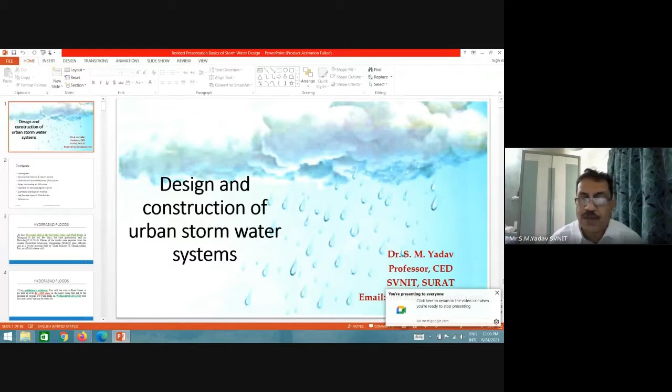So that was the first lecture on the topic of smart cities, and from the smart cities point of view, how we can protect our smart cities from recurrent floods. In this lecture, the other part of it, that is stormwater management, which is one of the key parts of planning of smart cities. Whenever you develop smart cities, one of the major planning and design requirements is the urban stormwater system.

I remember one incident that was told by my colleague who is a part of the Dholera development plan. In that Dholera development, one very senior hydraulic engineer was present, and they were talking about the cost of laying the stormwater management system. Somebody from the experts said, this stormwater drainage which is proposed is costing crores of rupees. Instead of that, let us go for reduced diameters of the pipes, revise the stormwater system, and not go for the system which is proposed for draining Dholera.

You know that it is a special investment region, and probably in 2024 or 2025 there is a phase-wise development, and after 10 years, probably a city like Singapore. That much initiative, planning, measures, and new developments from the smart city point of view are going on in Dholera, the special investment region.

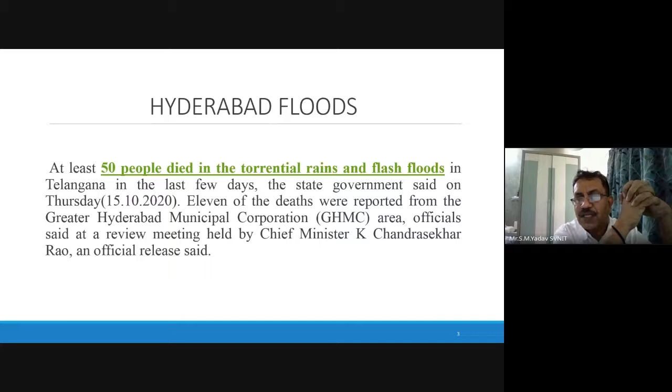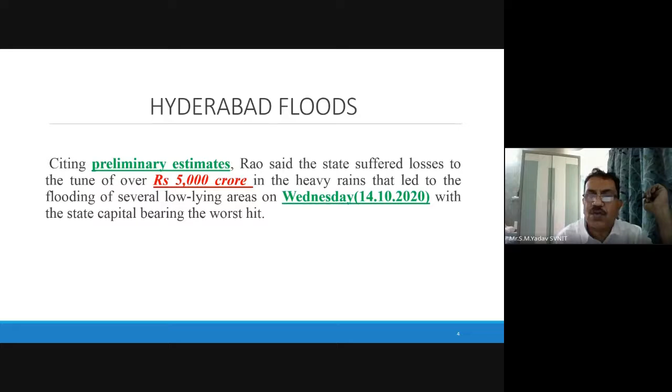I think Hyderabad is also one of the smart cities, and in October 2020, 50 people died in the torrential rains and flash floods in the city, right? And that is over Telangana, and the loss was around 5,000 crores, right? So what has happened, we will see here.

This is the picture which you see on your screen. That is not of any stream or nala. Usually you see such a picture in case of water flowing in a river or a stream. Here you can see it is a street, right? On either side there are houses, and you can see the people are also there.

Yeah, I can use the pointer now. Yeah, I got that. Let me take the laser pointer.

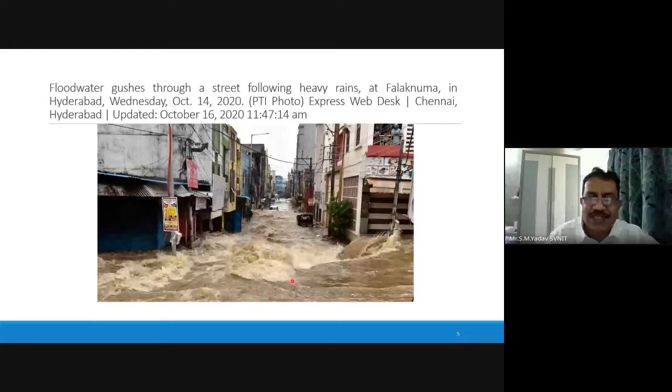Just see here, these are the people who are watching this water which is flowing through the streets. And you can see how much is the depth. Here is a jeep parked on a street, and almost its tires are underwater. So the depth of water is approximately half a meter to 1 meter, right? And as I said, it is not a stream or a nala, but it is a street, and through the street the water is flowing like this.

So this is the picture of your FDP. Jagruti ma'am, if you are there, you can use this as the picture of this FDP on why smart cities, why smart city planning is required, right? So you can post this picture whenever you are presenting in front of the authority.

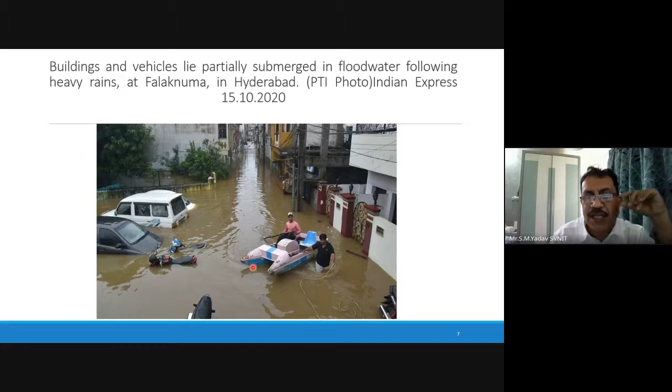See the picture here; this happens when there is a flood in a city. This has happened because of torrential rain in one of the societies of Hyderabad. This picture was taken by PTI Indian Express on 15/10/2020. So this gives an example of the significance of stormwater drainage and how important stormwater drains are, right?

Flash floods. These are the heaviest rainfalls in Hyderabad: in 1908, 153 mm; in 2016 it is 215 mm, right? And in just 36 hours, 220.7 mm of rainfall in August 2006 took place, while in September 2016, rainfall figures up to September 25. So such a huge rainfall received by the city of Hyderabad has resulted in the floods in Hyderabad city.

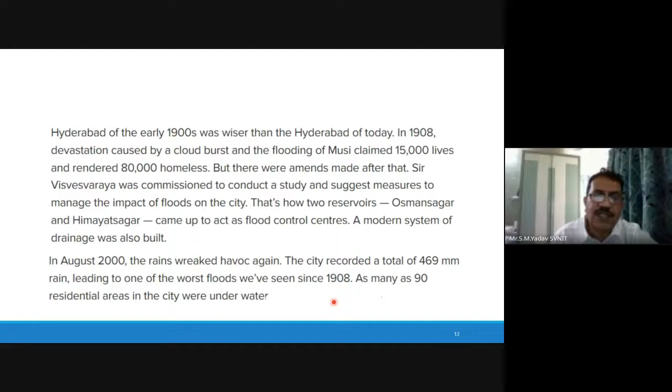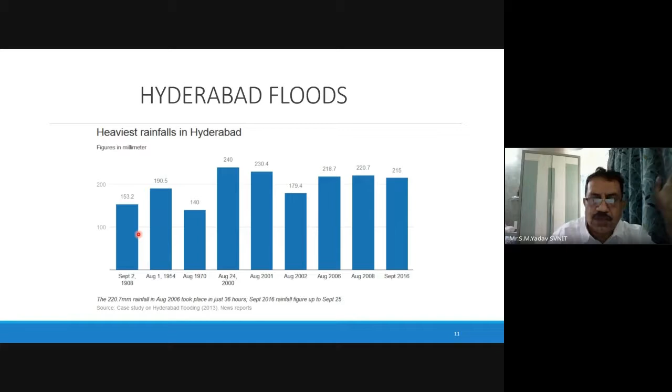So keep in mind one thing: the flood which I showed in the previous lecture was a riverine flood, right? The floods were caused in the cities because of flows from the river. This is not a riverine flood. Understand the smart city infrastructure requirement from this point of view: in Hyderabad the flooding is not due to a riverine flood, it is due to rainfall. And when there is high rainfall in Hyderabad city, a number of areas of the city are under water. Okay, so this is all history about Hyderabad that I am not reading.

But why do we need an urban drainage system? After giving this background of what has happened in Hyderabad, we emphasize a good drainage system in smart cities. Drainage systems are categorized as major or minor systems. So the urban drainage system can be classified into two parts: major drainage system and minor drainage system. The major drainage system comprises open nalas and natural surface drains. The minor system is a network of underground pipes and channels.

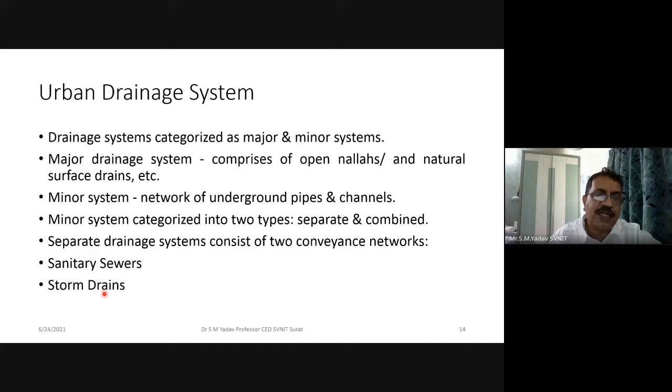The minor system is categorized into two types, separate and combined, right? A separate drainage system consists of two conveyance networks, that is sanitary sewer and storm drain. Sometimes we combine both the sanitary and storm drains. And one of the major problems of storm drains in our country, when we talk about the quality of water, is that at many places the sanitary sewers are connected with the storm drains, right?

So what are drainage processes? This is the heart of the lecture. According to Mark et al. 2004, urban drainage processes can be classified into three components. Number 1, hydrological model; number 2, street model; and number 3, pipe flow model. The street model and pipe flow model are the hydraulic component, the hydraulic model, while the one based only on meteorological parameters is our hydrological model.

So what does the hydrological model include? It includes rainfall, catchment area, impervious areas, which result in a runoff hydrograph. This will be used as an input for designing either the street model or the pipe flow model. In the street model, there is street and storage routing, water level, discharge and inundation. So this hydrograph is used to check what the water level will be, how the water will move through the streets, what discharge it can pass. All this you can study under the street model.

In the pipe flow model, if you have an underground network of storm drains, then you should have a catch pit which catches the water and takes it into the sewer. This may be a storm sewer also. Sewer pipe here means a drainage pipe, and you have to do that sewer flow routing, and ultimately you have to discharge it. Water level and discharge are to be determined.

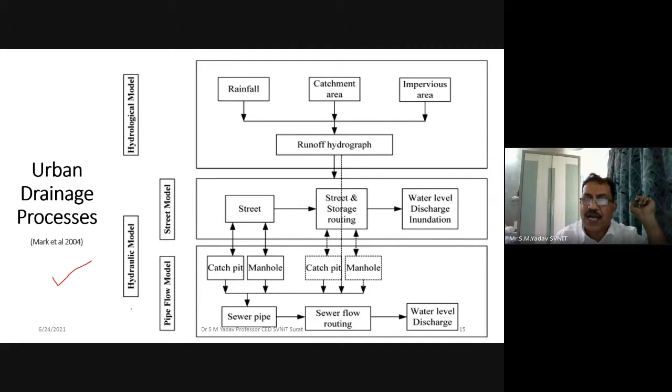Okay, then stormwater modeling. As I said, from rainfall and all that, you get a hyetograph, the graph of time versus rainfall intensity, how much rain has fallen in what time period. You can plot it, and that is called a hyetograph.

This hyetograph results into overland flow, that is what we call as runoff. So what are the components of rainfall runoff models? That overland flow, at which time what discharge and what may be the peak discharge, that we wanted to find out, and it will be used as T versus Q. What is the requirement of rainfall runoff modeling?

You need a hydrograph. What is a hydrograph? That is a time versus discharge curve, right? That time versus discharge curve will give you the storm hydrograph, which is used for the design of the stormwater network. Okay, why? The amount of rain which will enter into the pipes, right? Storm drain system may be open or closed, that depends upon this factor.

What is that? C is your coefficient of runoff, right? That is how much water will enter into the stormwater network and how much will be lost over the ground. So these two data, number one is the hydrograph, and number two is the coefficient with time. These are the two inputs for rainfall runoff modeling. So if you are doing rainfall runoff modeling, these are the two inputs which are required.

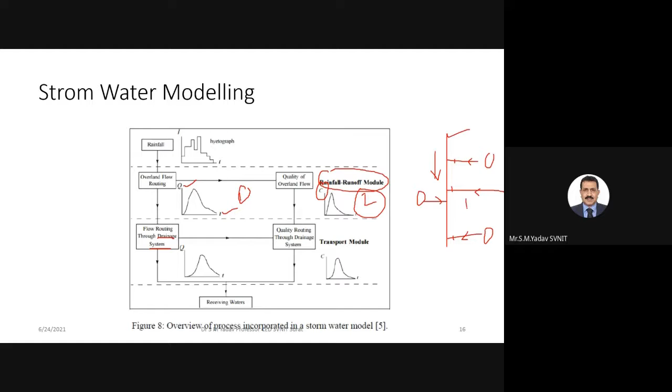And number two, for these three drains, when you close this floodgate, the water which is required to be drained out of the campus may get impounded in the campus. So for that I have given a solution that you construct a sump here and put a pump over here, so that this pump will start pumping the water from the campus onto the road outside.

This is an SMC road outside, so you can't stop the impounding of water, but you can definitely reduce the depth of water impounding inside the campus. This solution was recently given by me to Gujarat Housing Board for their storm drainage system.

So the components of stormwater modeling are rainfall, for which a hyetograph is required to be prepared, and overland flow routing, for which you need an inflow hydrograph and the coefficient of runoff, which varies with time. Suppose there is a monsoon rainfall in the month of June.

When the rainfall has just started, the soil may not have that much moisture. But if the rainfall progresses through June, July, August, and there is a good rainfall year, the soil may have sufficient moisture, and the coefficient of runoff may increase. Because of that, the peak runoff generated may increase, so this is also required as an input, whatever software you use.

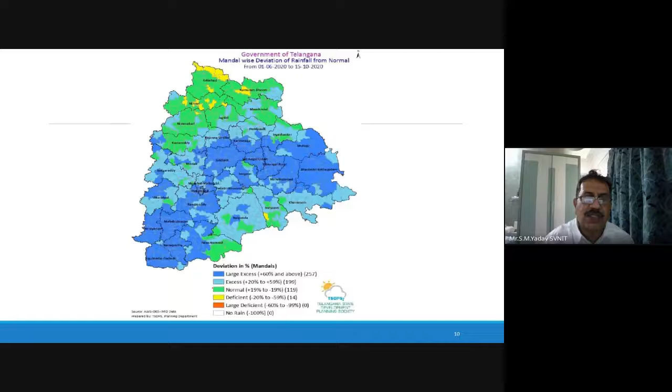And regarding quality - in developing countries, awareness has started that stormwater should not get mixed with sewer water. You can take samples at a number of places. Students attending this presentation who want to do an innovative study can take up a dissertation or research topic where they collect samples of water from storm drains and study the quality of stormwater drains in urban cities. This is called a quality module, written as quality routing through the drainage system.

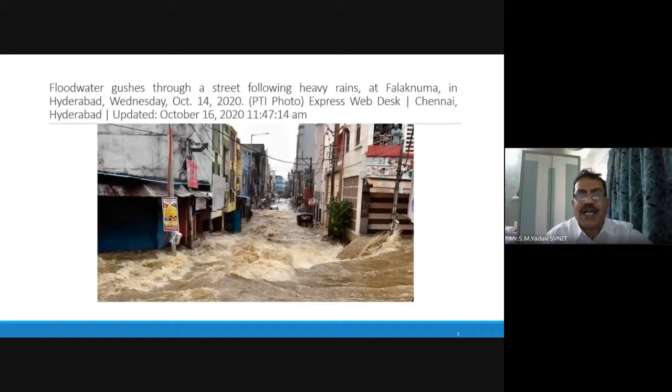This specific society is developed in a waterway, which means the catchment area where water is supposed to pass through, and in that area the people have built the society. That's why it's important to know the topography and the slope of the area, to understand from where and how the water will flow through the system. So that is watershed or catchment area as a basis of urban drainage.

Very simple. Not all things are very complicated. You can use a DEM of a specific resolution. If you use a finer resolution DEM, you can get the slope of the areas very easily.

Someone may ask, sir, from where will we get the map of such fine resolution for various city areas? Simply visit the ISRO website. On the ISRO website you can find the finer resolution map, which may be useful for finding out the slope area, the amount of runoff, and specifically the direction of flow, that is, in which direction the water will flow. All this you can find out from the image, which is freely available on the ISRO website.

Check the Ahmedabad ISRO website, or the Dehradun website, and you can even write to them. They may provide you the image up to a certain resolution free of cost. If you go for a finer resolution, you may need to pay for it. But again, you are using it for academic purposes, so the cost of the image is very low.

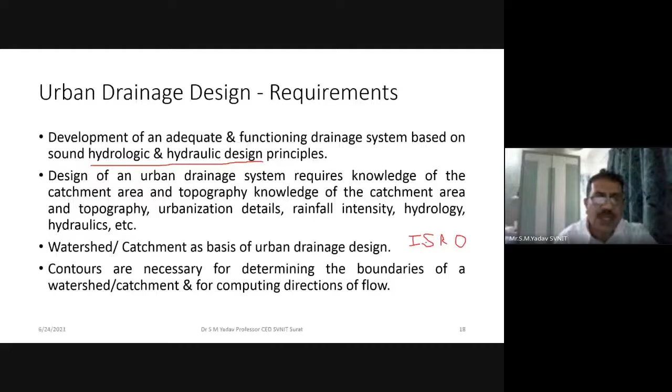You need rainfall data. I have explained that rainfall data is required, and from rainfall data you need to prepare IDF curves, that is, Intensity Duration Frequency analysis curves. These IDF curves are prepared for a minimum resolution of 15 minutes. I have an IDF curve here; this is rainfall data, so you can note down rainfall figures on this side.

Somebody will say, sir, we don't even get rainfall data. Yeah, nowadays it is not that difficult, unlike 5 or 10 years back.

Those faculties attending this presentation may note this is a website from which you can get the data, or you can write to the data center in Gandhinagar, from where you will also get the data. You can check the IMD website, or the IITM Pune website, and data for your region may be available. Such rainfall data are available nowadays for a specific date.

They are even recording hourly data if they have weather stations, because weather stations are installed in cities, and these stations record rainfall data every hour. Hourly rainfall data are available. If you are in Vallabh Vidyanagar, you can check with Anand Municipal Corporation or Anand Nagar Palika, whichever it may be. They probably have also installed weather data equipment, and it may be active and recording hourly rainfall for the last 4-5 years.

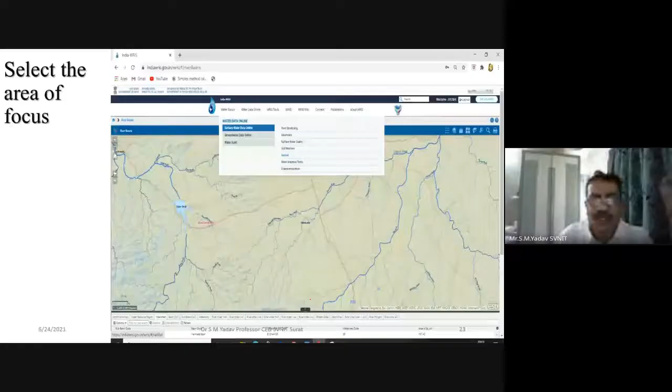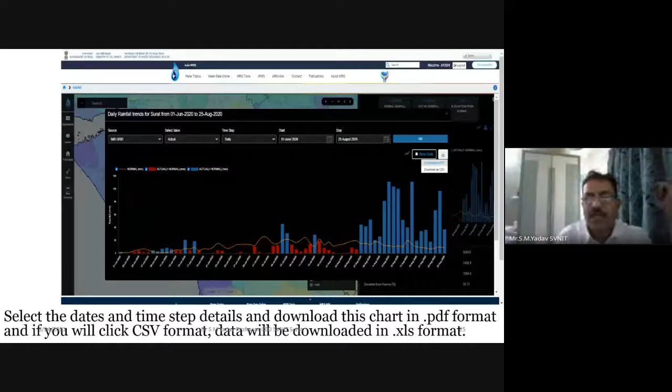Select the area of focus to download the data from India-WRIS. I have incorporated that slide too, showing how to select the area for which data is required, like Surat, and the period you want. Select the dates and times, step details, and download the chart in PDF format. If you click CSV format, the data will be available in Excel format.

So friends, if you are attending this lecture and are really interested in stormwater drainage design network, this is the rainfall data. These 4-5 slides show you how to get rainfall data of your area in CSV format from the India-WRIS site.

Now, estimation of missing data. Naturally, there is data which is not available in the file you have downloaded, and there is certain missing data. There are so many techniques of finding missing data.

Those interested in carrying out this study on stormwater drainage systems or research on this may note Ramesh Teegavarapu, popularly known as Dr. T, from Florida Atlantic University, Boca Raton, USA. He has given a number of methods. Just visit his webpage, and there is lots of research material only one click away.

You are not required to pay a single paisa for it. You can download those methods and read them. I have explained here one method, which is the normal ratio method.

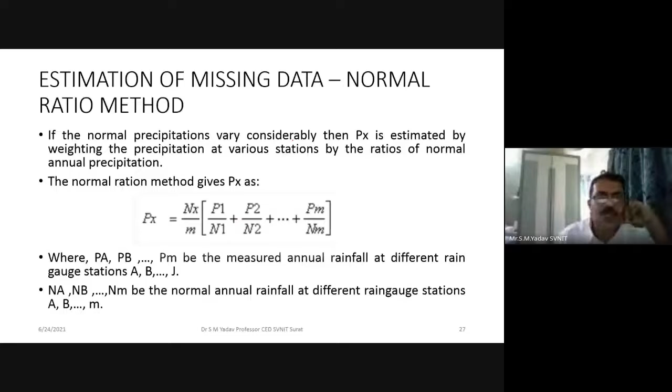In the normal ratio method, suppose the Px value is unknown, and you have P1, P2, Pm values for a number of data points. Then how can you find out the missing value? That is the first method, called the normal ratio method, and using it you can find out the missing value.

The second method is the modified normal ratio method. This equation given here can also be used to find out missing rainfall data. Then the most popularly used method for finding missing data is IDM, which stands for inverse distance method.

This inverse distance method can be used for finding the missing data. Rainfall measured at the surrounding index stations is to be collected, and the distance to each station is to be found out. Suppose you have one station which is missing, but there may be a number of stations around where data is available. You find out those distances, and then use this specific formula to find it out. This is the second step, from which you can find the missing values.

So I'm going step by step on how to design a stormwater drainage system. First is the rainfall data, where you get rainfall data for India, which I explained. Then I discussed the second point, missing data, and how to find it out. I explained three methods for missing data: IDM or inverse distance method, which is popularly used for finding missing data.

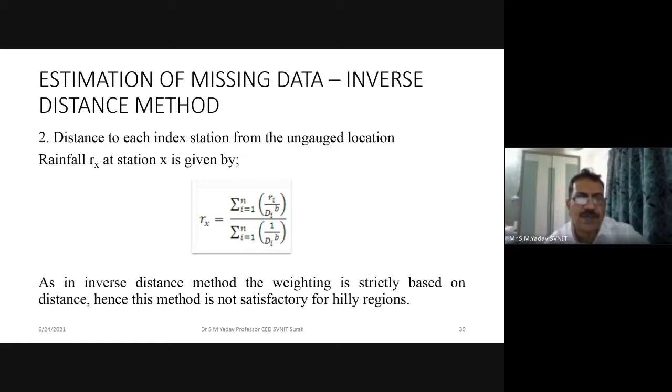So we finished the rainfall analysis. So now, what is required?

We are required to develop a hyetograph, the first step of rainfall-runoff modeling, that is stormwater modeling. The hyetograph can be developed for various time intervals. The hyetograph that I have shown you in the basic chart, what is that? T versus rainfall. Yeah, this one. This is T versus intensity, time versus intensity. Here you can see that it is a time versus intensity graph of rainfall.

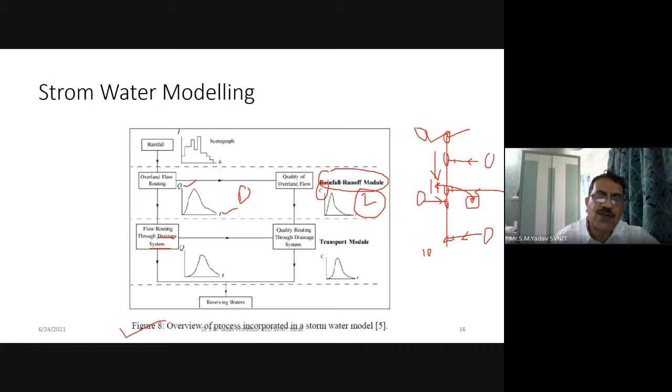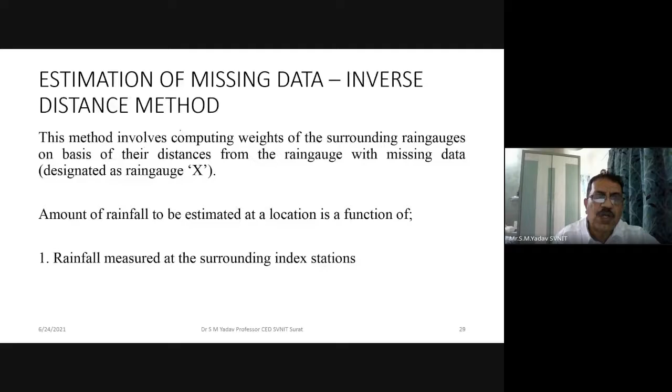Once you have got the rainfall data, what is your first requirement? You have to prepare a hyetograph where you find time versus intensity. In this particular step, after missing data, you have to prepare the rainfall hyetograph, and that hyetograph you can prepare based on different time intervals. It is also given as a guideline: for urban drainage problems, less duration is used, and for flood flow computation, higher intervals, about 6 hours, can be used.

So what resolution or what scale of hyetograph is required for stormwater modeling and flood modeling? If it is stormwater modeling for urban drainage problems, less duration, 15 minutes, 30 minutes, 1 hour, 2 hours rainfall duration hyetographs are required for designing the stormwater drainage system. While if you go for flood computations, you need lower resolution, that is 6-hour duration hyetographs.

So what is a hyetograph? That is shown over here: in the first 10 minutes the rainfall has fallen with 0.8 inch per hour intensity, then 10 to 20, 20 to 30. The duration of rainfall was 1 hour. So during 1 hour the rainfall has fallen with this intensity. So this is a graph of time versus rainfall intensity, the hyetograph you are required to prepare.

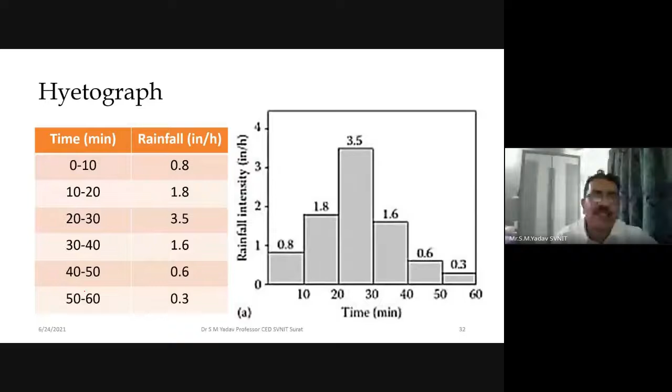Once you prepare the hyetograph, you have to design your stormwater system for a particular recurrence interval and return period. So what are recurrence interval and return period? This is the next step of designing a stormwater drainage system. Return period, also known as recurrence interval or repeat interval, is an average time or estimated average time between events such as earthquakes, floods, landslides, or a river discharge flow to occur again. It is statistically a measurement typically based on historic data over an extended period, and is used usually for risk analysis. Recurrence interval is given as (n+1)/m.

So when you are designing a drainage system, as you have seen in the case of the flood in Hyderabad, that rainfall was maybe a rainfall of once in 100 years. Means rain of that magnitude falls after 100 years; the probability of that rainfall is once in 100 years. So how to find out what intensity of rainfall you consider for what period?

For example, if you consider a rainfall of 2-year period, it may have a very small magnitude of rainfall. If you consider 1 year, still it is lesser. But if you consider 5 years, it is more than the 2-year rainfall depth. If you consider 50 years, the rainfall depth may be more for the same area. If you consider 100 years, the rainfall depth may be still higher than that of 50 years. So that is recurrence interval and return period: how often that event can be repeated.

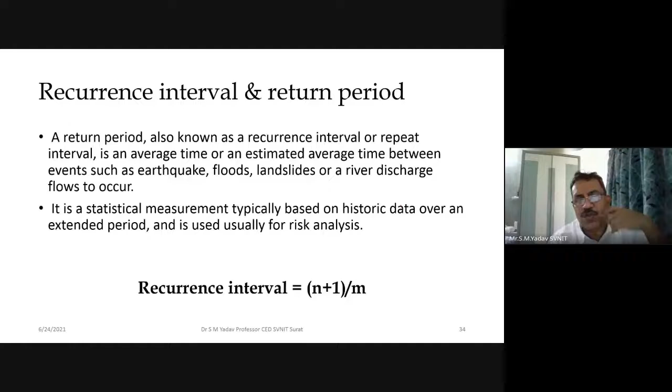Then intensity duration: the amount of rain fallen and its duration is different for different cities or areas, and therefore we plot IDF curves. From these IDF curves we get an idea of how much rainfall is required to be considered for the design. I know Palvi, one of my students who is attending this presentation, has developed an IDF curve using, I think, 150 years of data.

Yes, I'm there. Yes, it's 150 years data. 150 years. So together, Palvi and myself have developed this for the case of the Jahangirabad Gujarat Housing Board consultancy work. I asked Palvi to develop an IDF curve using the data of 150 years of Surat city, right?

And from that I have considered the intensity of rainfall that will help me for finding out the amount of runoff generated in that particular area, which I will use for the analysis of the stormwater drainage system which is already there, up to what amount of rainfall and for which intensity the existing storm drain is capable of disposing of water from the campus,

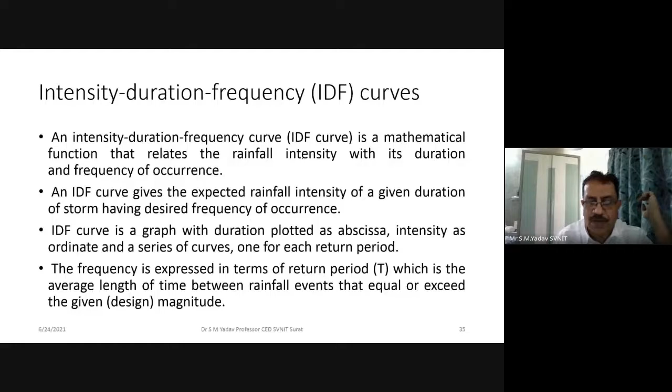and if it exceeds beyond that, what will happen in the campus. That analysis we have carried out using 150 years of rainfall data, right? So these are some of the points why we need to develop our IDF curve, and how this IDF curve can be used. So for development of the IDF curve, the steps are given. First, you have to prepare the annual maximum data series.

From the available rainfall data, rainfall series for different durations, 1 hour, 2 hour, 6 hour, 12 hour, 24 hour, are developed. For each selected duration, the annual maximum rainfall depths are calculated. Then we have fitted it to a probability distribution. A suitable probability distribution is fitted to the selected data. The most widely used probability distribution for Indian rainfall is log Pearson type 3 distribution.

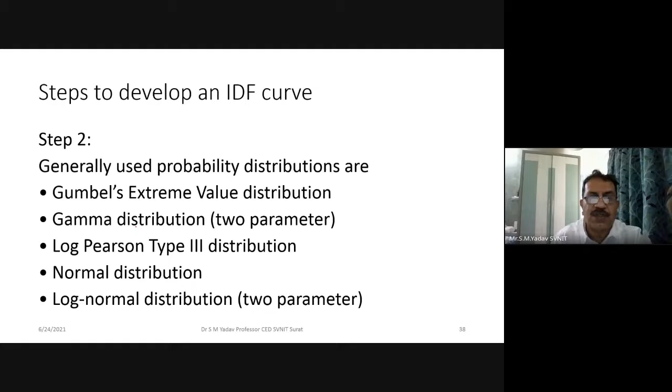Gumbel's is used for extreme value distribution. These are the names. Log Pearson type 3 distribution is the most popularly used distribution for Indian rainfall analysis. There are many other probability distribution curves, and depending upon the region, like USA, UK, Nepal, Sri Lanka, Dhaka, Bangladesh, you can use different probability distributions for fitting the IDF curve. So in India, we are usually using log Pearson type 3, if I am not wrong, right?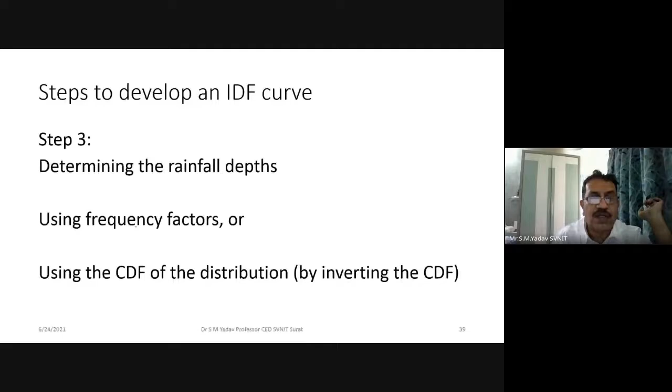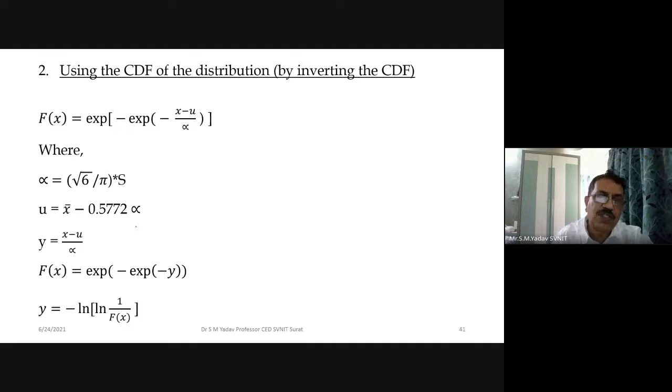Then the third step is determining the rainfall depth using the frequency factor, and using the cumulative distribution frequency of the distribution, we can find the cumulative distribution frequency curves. That is the fourth step. Some of the equations for the frequency factors you can consider are shown here. Then using the cumulative distribution frequency curve, these equations are given, and this type of return curves are prepared, right?

IDF curves are prepared. So what are basically IDF curves? On the x-axis you have the return period, and on the y-axis the maximum rainfall intensity. What does this mean? For example, if I take 1 hour and draw a line from here for a 100-year return period, for this IDF curve, what intensity should I consider? This will be my intensity approximately. So I may consider 30 centimeter per hour, right?

So for a 100-year return period, for 1 hour duration, once in 100 years there is a probability of 30 centimeter of rainfall in 1 hour. That is called an IDF curve.

Again, you may have an IDF curve of this nature also, that is duration and maximum rainfall intensity, for various return periods. So here the return period curves are there. Suppose for storm drain design, we consider a 100-year period, because the return period is different for different designs, right? So for storm drain design, we can consider a 100-year return period.

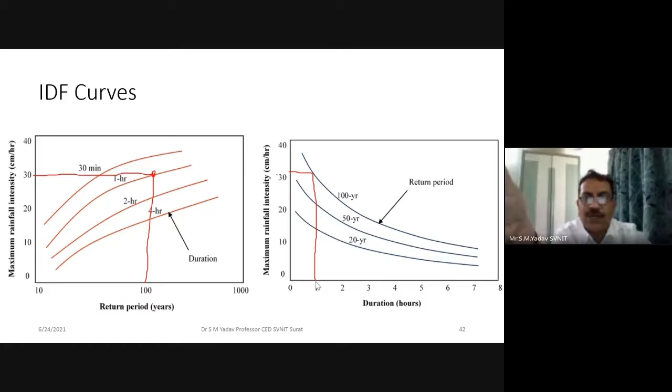So we have used 150 years of data for finding out the duration and intensity of rainfall for the city of Surat. Why? Because the work assigned to me was to check the sufficiency of the existing stormwater drainage system of the Gujarat Housing Board campus at Jahangirabad. So for that we have developed and considered this rainfall intensity for checking the existing stormwater drainage system of the Jahangirabad Gujarat Housing Board campus, Surat.

But this IDF curve is the next step which is required to be developed and can be used for the design. So this is again a sequence example for developing of IDF curve, in which the data is taken and then how 15 minute, 30 minute, 45 minutes, 60 minutes, 75 minutes, and 90 minutes data can be used and analyzed, and the rainfall amount can be calculated from the data which you have. That is the step 1.

And somebody will ask, sir, आप तो ये सब बोल के चले जाओगे, then from where can I get all this? So please note down this CPHEEO manual, that is Central Public Health and Environmental Engineering Organisation manual. This is popularly known as CPHEEO manual. So please refer CPHEEO manual, and in CPHEEO manual they have given this example of developing the IDF curve by which method? Gumbel's method, right?

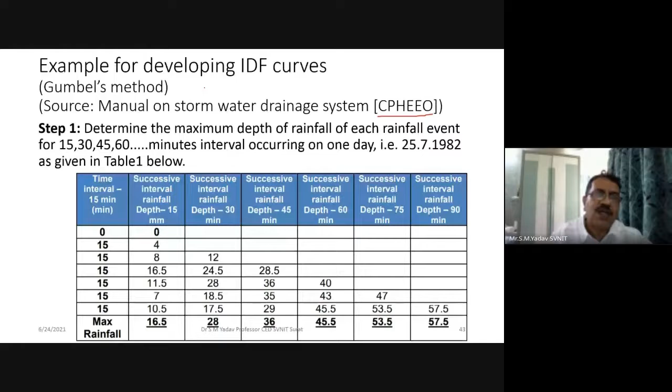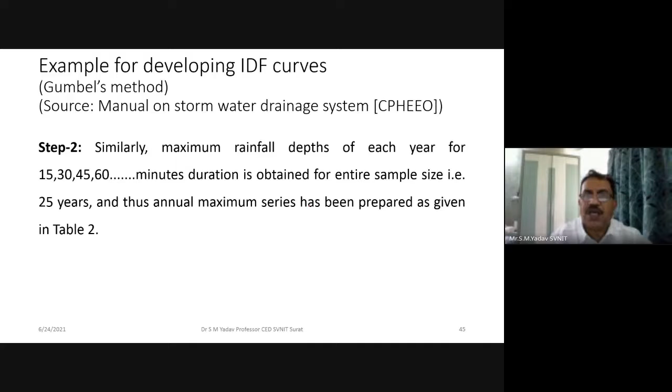This particular IDF curve example which I am showing here is given in the CPHEEO manual, and that is to be used for fitting of the probability distribution. Then second step is similarly maximum rainfall depths for each year. Minute duration is obtained for entire sample size, that is for 25 years, and thus annual maximum series has been prepared as given in table 2. So this is the annual maximum series for 15 minute, 30 minute, 45 minute data you have to collect, and you have to pick up the maximum value out of the entire sample size.

That in 1979, what was the maximum amount of rain fallen in 15 minutes? So it was 21.5 mm. What was the maximum amount fallen in 45 minutes? So that is 32.5 mm. Like that, you have to analyze the entire sample size 1979 to 2003. So therefore it is called as maximum annual series rainfall depth. You can do it for daily also, you can do it for hourly also. You can take 10, 20, 30, 40, up to 60 minutes. So if you have data of hourly rainfall, you can prepare such maximum daily series rainfall depth. This is maximum annual series rainfall depth.

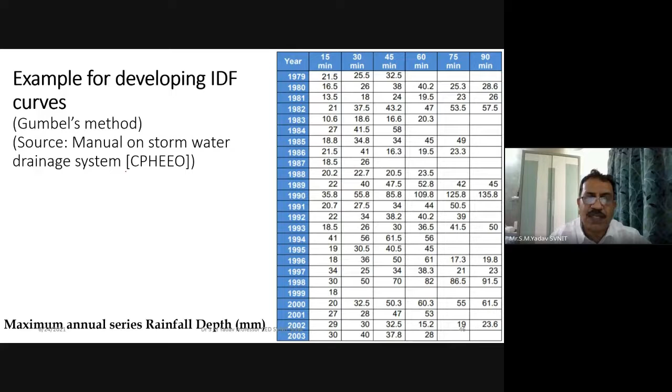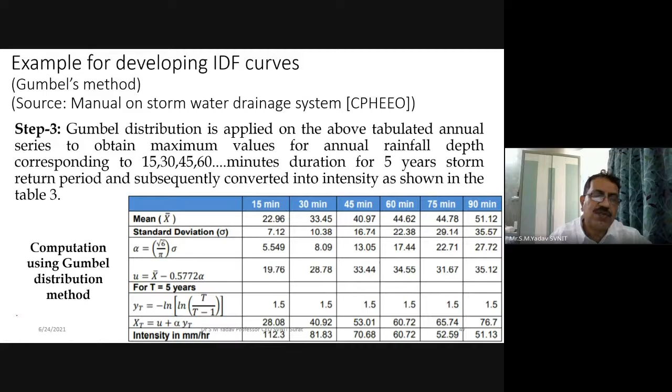Maximum annual series rainfall depth using the Gumbel's method, and reference for this method again is the CPHEEO manual. Then next is fitting of Gumbel's distribution. These are the equations used for Gumbel's distribution method, and from that it has been computed that intensity in mm per hour for 15 minutes is 112, 30 minutes is 81, 45 minutes 70, 60 minutes is 60, and like that. So using Gumbel's distribution method you can find out the intensity in mm per hour, and this way you can plot a graph of duration versus intensity for that specific rainfall data. Here the return period will come, and that is a 5-year return period. So this kind of curve you can prepare, and this may be used in further analysis.

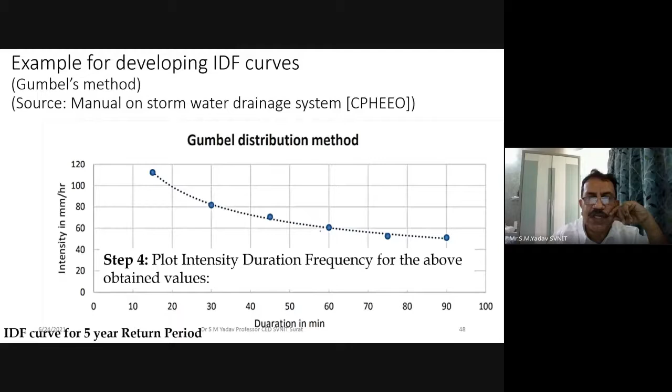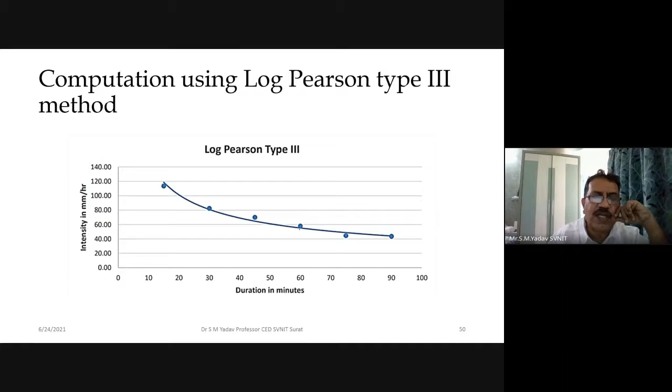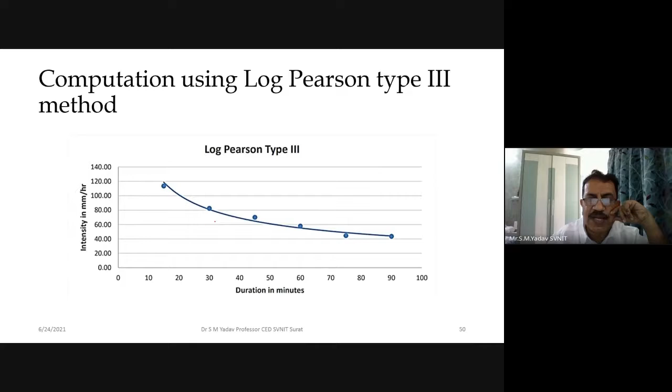Then construction of IDF curve using second method. What is that? Log Pearson type 3. The similar process is carried out. These are the equations used for log Pearson type 3 distribution, and from that you can find out various values of the rainfall intensity for different durations. And this is the curve for 5-year return period. Out of these two you can choose any one: log Pearson type 3 method or Gumbel's distribution method. For 60-minute duration, Gumbel's method gives 60 mm of rainfall, and log Pearson gives almost the same, slightly less, 58 mm. So this way you can fit the probability distribution to your data and develop a 5-year return period curve from your data. So that is the next step.

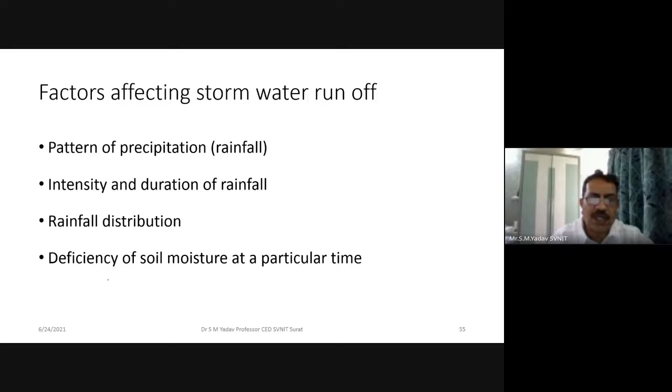Now once you have computed the intensity, the runoff is required to be computed using various methods of computing runoff. For that computation of runoff, we have various formulas. The factors which affect the runoff I am not considering. Of course, briefly: pattern of precipitation, intensity, rainfall distribution, deficiency of soil moisture, evapotranspiration, etc.

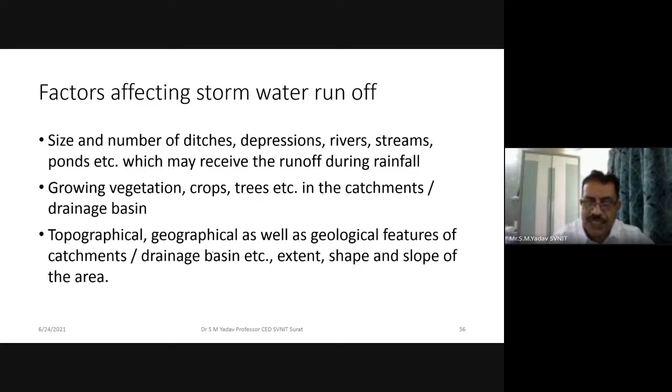Size and number of ditches, depressions, river streams, ponds, vegetation, topographical conditions. These are the factors which are used for computation of runoff. The most popular method which is used for computation of runoff is the rational method.

In the case of the rational method, the formula Q = 10 CIA is used, where Q is runoff in meter cube per hour, C is the coefficient of runoff, I is intensity of rainfall in mm per hour, and A is drainage area in hectares. Whenever you use the rational formula, please be sure about the units.

Because different books give different rational formulas for finding out the runoff, you must be sure in which units they have worked it out. As I have taken Q = 10 CIA, you may get CIA/3.6, another form of the rational method, but in that case the units may be different. So in this you get the discharge in meter cube per hour. So the rational method can be used for this.

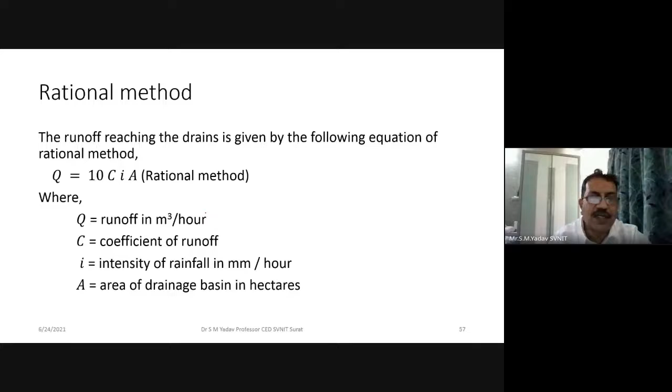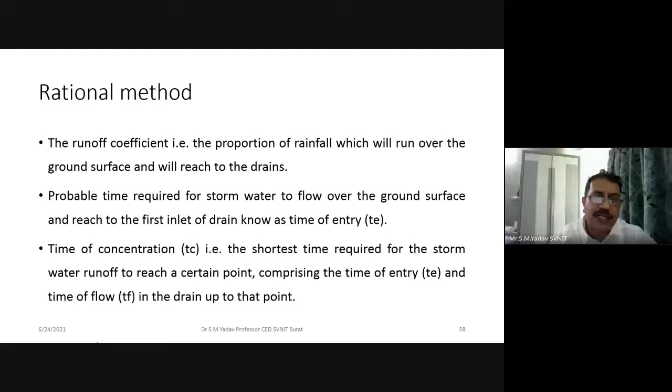Then the importance of time of concentration: the runoff is generated, but the runoff from the farthest point has to reach the channel inlet or the stormwater inlet. So it takes travel time. That travel time is from the farthest point to the inlet point of the storm drain, and the flow taking place inside the channel is the time of flow, TF. So time of entry, and time of flow TF in the drain up to that particular point.

The probable future condition is also required to be found out. This is about the coefficient of runoff which you have to consider based on imperviousness and open area. You get a ready-made table in the CPHEEO manual also. And suppose you have different areas, some vegetation, some paved surface, some pond areas,

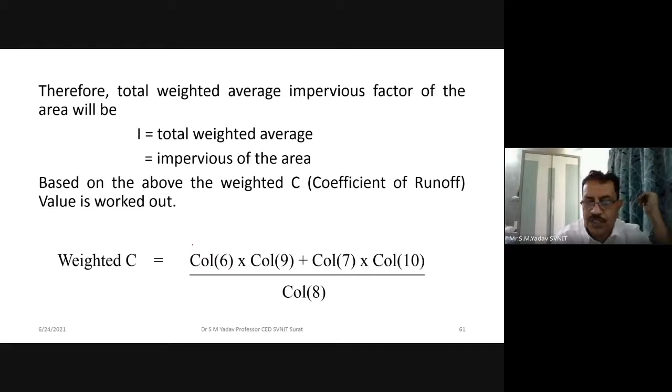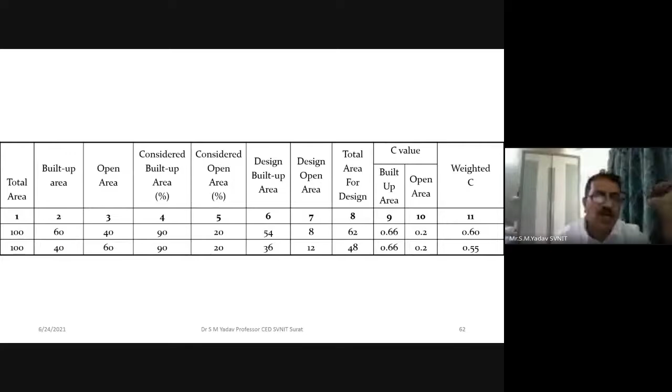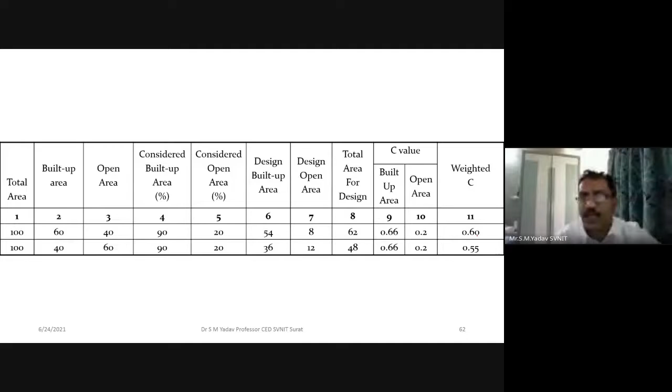then you can find out the weighted coefficient C, which is also taken from the CPHEEO manual method, wherein the total area is built-up area and open area, 60% and 40%, and based on that the coefficient of runoff has been computed in the last column, which can be used for the computation.

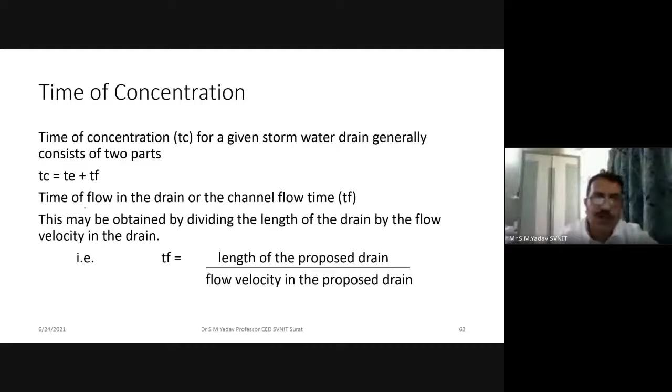Then as I said, time of concentration is the summation of time of entry plus time of flow in the channel. Time of flow in the channel is the length of the proposed drain divided by flow velocity in the proposed drain; that will give you TF. Time of entry is how much time it will take from the farthest point to the drain. This figure shows you how the time of concentration is computed.

You will see here, the thick pink line is a drain, and this is a draining nala, into which the drain discharges. There are two drains: drain 1 above and drain 2 below. So you have to divide that area, and where you divide the area is called the median line.

Area in this part will drain to drain 1, and area of this part will drain into drain 2. From the farthest point of the catchment, the time required for water to flow to the drain is T1. And the time required for water to flow from this point to this point in the nala is time 2, called TF. So this is T and this is TF, and T1 plus T2 gives the time of concentration.

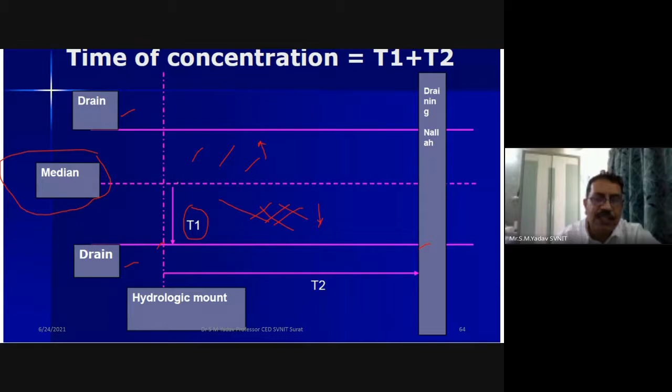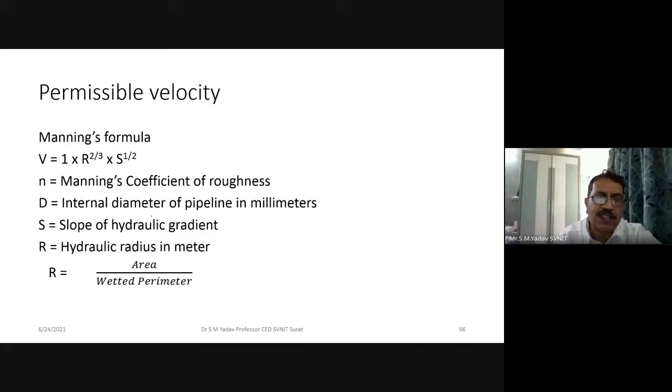Permissible velocity: you should not have excessive velocity. This is Manning's formula, everyone knows it very well, and from that you can compute it. The permissible velocity as per CPHEEO manual 2012, 3.3.26, you will find in meter per second, but practically it was restricted to 3 meter per second.

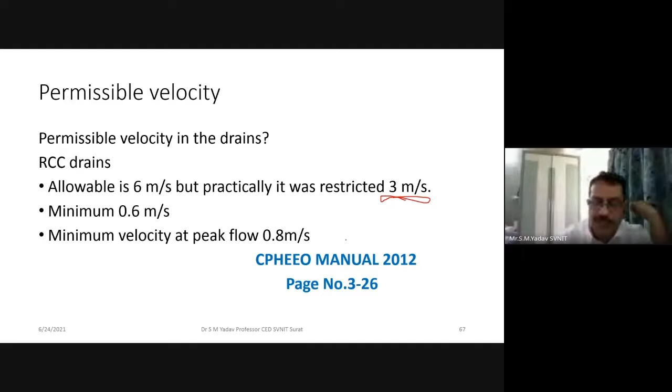So in a drain, the maximum permissible velocity is 3 meter per second and minimum is 0.6 meter per second, right? And minimum velocity at peak flow is 0.8 meter per second. So these are the permissible velocities which you have to keep in mind while designing the stormwater network as per CPHEEO manual. Then the size of the drain.

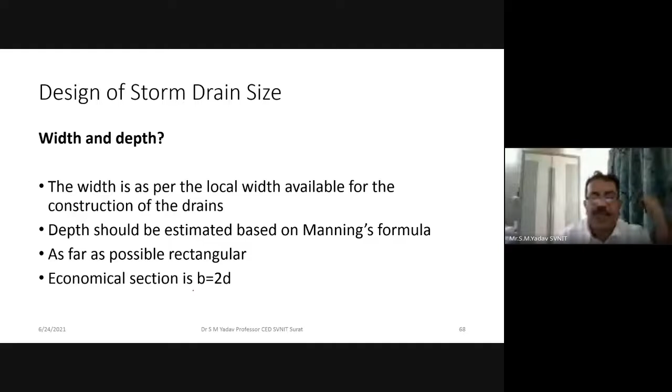So the economic size of the drain: the width is as per the local width available for the construction of the drains. The depth should be estimated based on Manning's formula because slope is there. If you are constructing a rectangular open drain, then B is 2 times the depth. The width of the drain is 2 times the depth of the channel.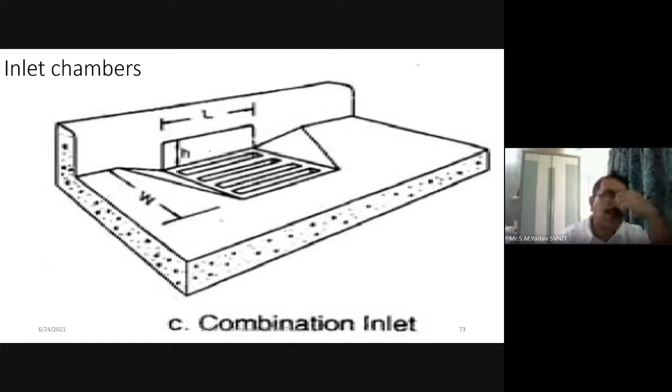through the curb opening, right? Then inlet chambers, combined inlet: curb opening and inlet chamber, two are provided in one place. Then there are slotted drain inlets, through which the water will enter. In the center the openings are there through which the water will enter into the storm drain provided below it, right? Then this is a picture of an inlet chamber again, which will be used for catching the water.

This is the combined inlet chamber, the inlet and the curb also. And here you can see a picture of a manhole, and this is only a curb inlet, no inlet chamber. This is along with curb and inlet. Here the inlet chamber is provided only below the curb.

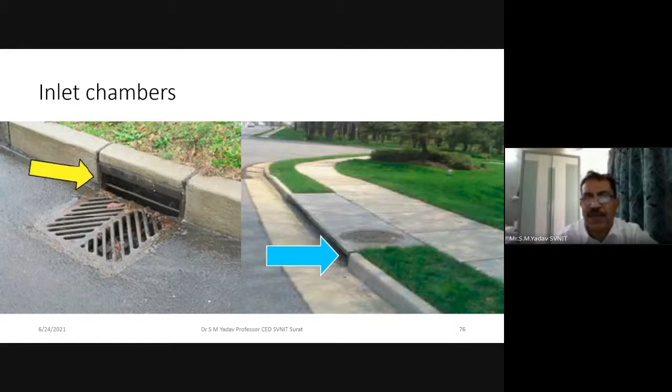Junctions: we have to couple the sub drain with the main drain. Always couple it obliquely, never combine it at 90 degrees, right? 45 degree or 87 degree. 90 degree is not allowed. If you connect it at 90 degrees, the water will not flow properly between the sub drain and the main drain. So this is the angle which is required to be provided for junctions, right?

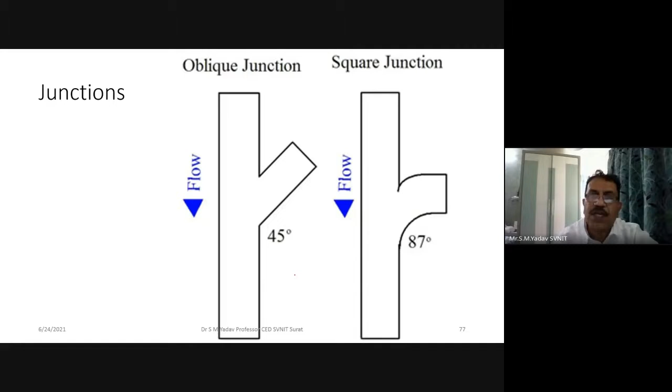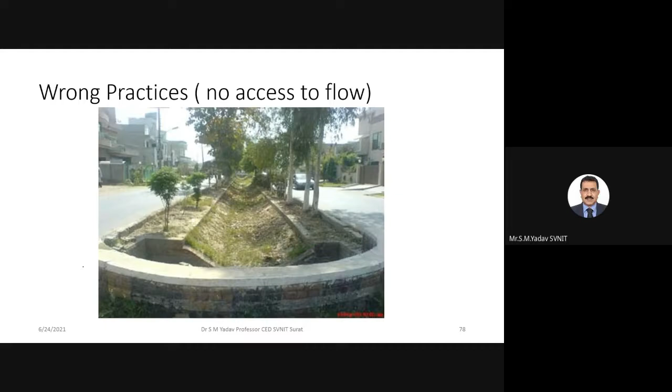What are the wrong practices? Some of the pictures I have taken over here: you see this is the storm drain provided here. This is the road, this is the curb provided, and there is no inlet to this from the roads, right? There should be some inlet provided from either side of the road so that the water can drain into the channel, right?

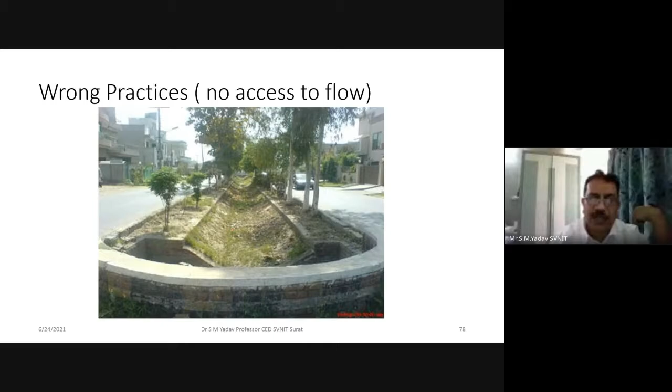Some of you have seen during the monsoon season that instead of water draining into the drain and into the storm water, the water is flowing back from the storm water. When this happens, when the storm drain is full and it is leading to lower elevation from higher elevation and it is full, then what will happen?

If the manhole provided on it is not of enough capacity to withstand the pressure of the flowing water, what will happen? It will move the manhole and water will start flowing back out of it.

And this was exactly happening in the case of that Jahangirabad Gujarat housing campus, where because of backwater flow the water was entering into the campus. This is again a wrong practice. You just see that the inlet is higher than the surrounding ground. So don't be such type of an engineer, because you also will be practicing in the field. You see that because of one reason or other the inlet remains higher than that of the ground.

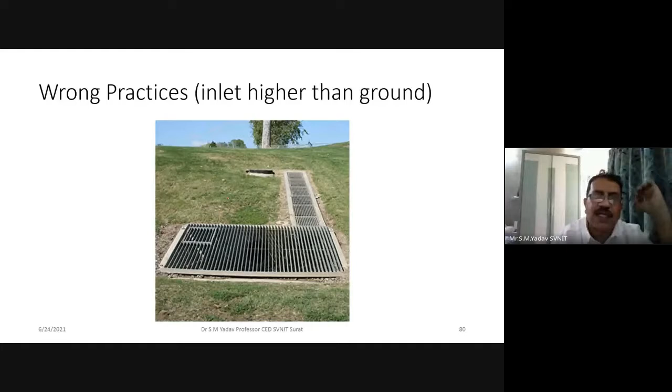Specifically this happens in case of roads, when they raise the road or when they lower the road, the chamber remains high and the road goes down, when there is a cutting in road during the construction of a road.

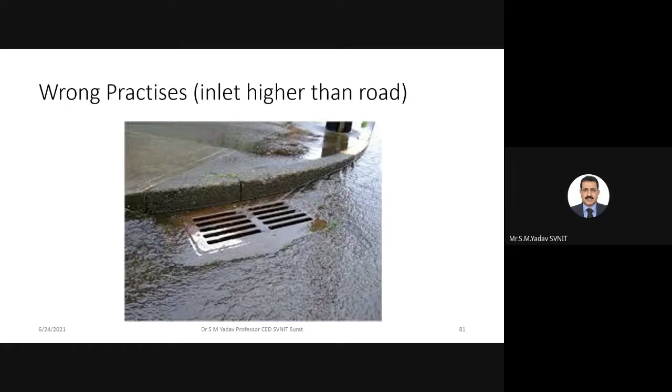This is again wrong practice. You will see how much water is ponded around the inlet chamber. This inlet chamber is higher than the slope of the surrounding area. This should at least be 1 inch lower than the surrounding areas, so that the water drains efficiently into this chamber.

So what are the software used for the design of stormwater drain? There is HEC-HMS, which is free software. SWMM is the most popularly used software for design of stormwater management. This can be freely downloaded. Then MIKE URBAN, which is very costly software, but it is having a GIS interface developed by DHI company.

If you know GIS, and if you have a map area of a city, you can combine it with the design software, and you can have computations and design of the network based on MIKE URBAN software. But this is a costly software.

Then there is Water GEMS. It is also not a free software, but popularly used, again a costly software. Bentley stormwater modeling and analysis software is also one of the costly software for stormwater modeling. Then Hydrology Studio, this is also one of the software used for designing.

I want to share a small story with you. When Bentley introduced the stormwater modeling software, the representative probably checked a website and my biodata, and the representative from the state of Gujarat called me saying, sir, we have a stormwater modeling software, and we want to give you a demo and show you the capability of our software. So I allowed him, and he visited me - this was somewhere about 15-20 years back. He demonstrated the Bentley software to me, and I found it quite interesting. Then I asked him what is the cost.

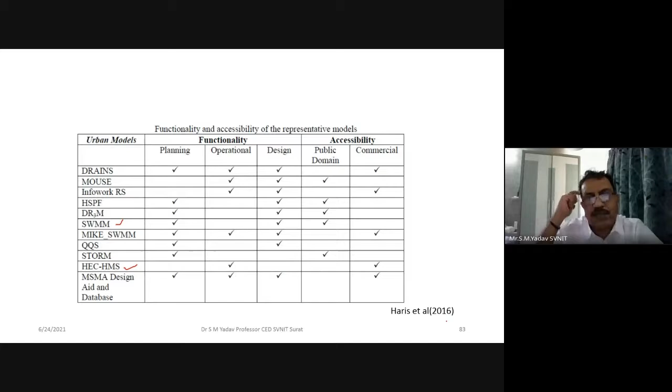You will see it's operational, and HEC-HMS is free now, not commercial, but as of 2016 I have to check the module again, because if it was written as commercial, probably the stormwater component may need to be bought separately. Otherwise HEC-HMS is free software, freely downloadable, but as far as stormwater is concerned, that component may be a commercial one.

So with MIKE software, you can do planning, operation, and designing, but it is not available freely - you have to buy it. So this Haris et al paper you can refer to; it is one of the good papers, very useful as far as stormwater designing is concerned.

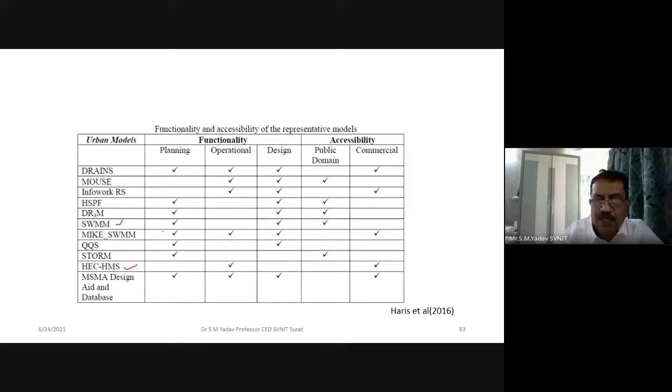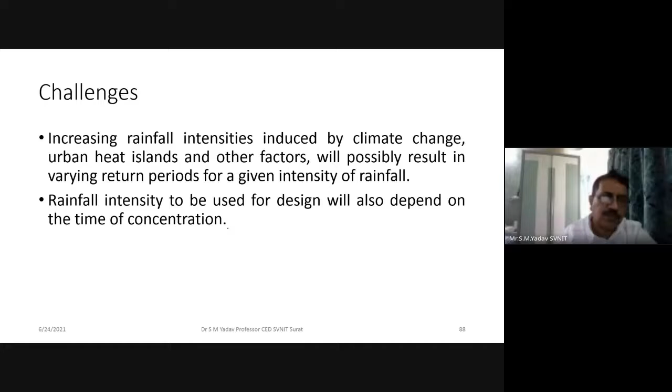Considering that this system will drain off water up to this mm only. If it is more than that, it is going to impound. So for higher catchment areas, peak flow computation, approximation of runoff coefficients, and recommendations for effective stormwater management, risk mapping of the areas of the city should be done to assess the vulnerability related to urban floods using GIS technologies.

Now what happens is that whenever the consultant work or whenever as a student you start designing stormwater drains, you start in reverse. First you find the software, and then you start finding the data. Then you put the data in the software, and when you get incompatible results...

...you start looking at the software. Why? Because the region or area for which you are applying that software is not capable of doing network design under such circumstances. So that's why it is written here that you have to check the city vulnerability, slopes, etc. You can even use GIS technologies for that, and then you choose the software or the methodology for designing the storm drainage system.

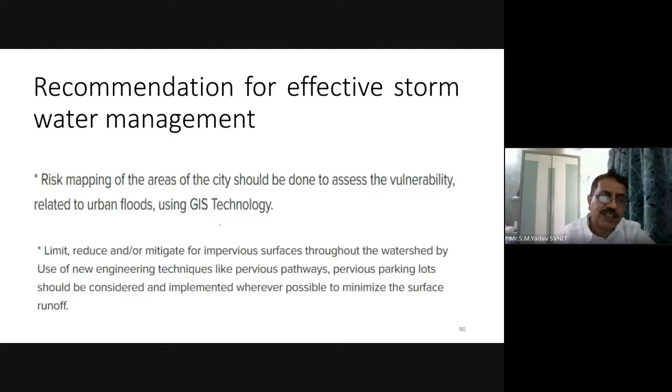Again, as I said, for high intensity rainfall of 60 mm per hour and 120 mm per hour, you cannot design for it. So there is a limitation of it.

Regular monitoring of prohibited areas from encroachment. Suppose you have designed a good storm network distribution system, but you find that the area from where the water is to flow freely has been encroached, or no proper ways have been maintained to drain water into the natural stream.

This results in flooding of the areas. Conserve and protect areas for groundwater recharge, whatever natural resources are there, streams, ponds. Now the Supreme Court has given the guideline that no ponds in any region of a city and no streams can be altered. You have to keep them as they are, and then plan your areas.

Encourage rainwater harvesting and rainwater harvesting structures. As far as possible, you can go for lesser runoff, so it will have less impact on the stormwater drainage system.

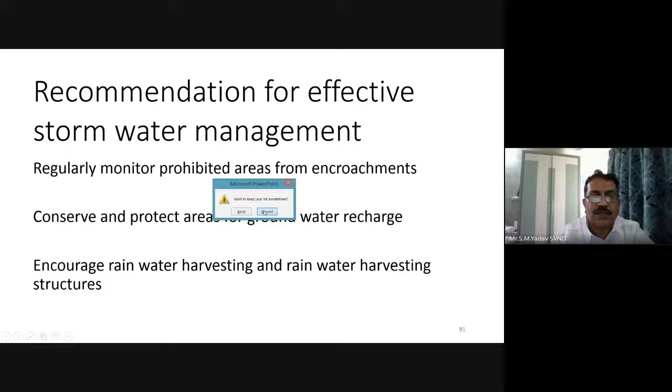So I tried to give you the maximum possible in one hour, one and a half hour, on the design of the stormwater system. And as I got response in the previous lecture, I did not ask you questions in between. You can ask me questions now if you have any.

So this is the entire design of stormwater for smart cities. This is a very important one, and probably all the aspects and basic concepts have been covered in this specific lecture. So if you have any specific question, either put it in the chat, or I'll just check.